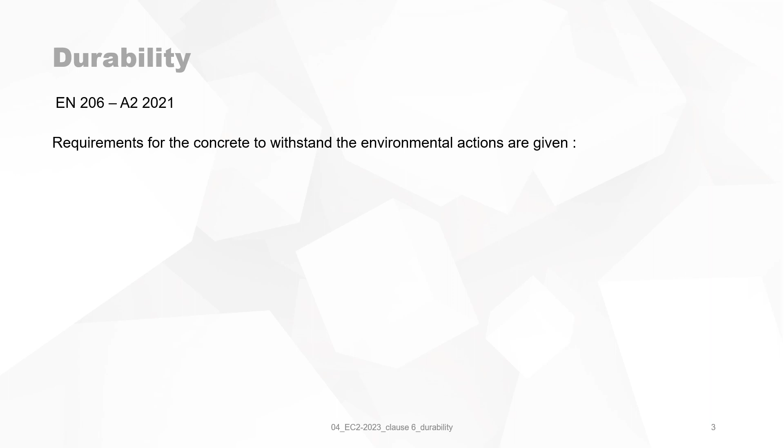This video deals with clause 6, and it's about durability and concrete cover. The requirements for the concrete to withstand the environmental actions are given in EN 206 with the correction of 2021. And for the requirements, you can have two different concepts.

The first one is in terms of limiting values for concrete composition and established concrete properties. This means that you are defining the content of a mixture, for instance. Today we are in the version of Eurocode 2004. Then we have Annex F in the EN 206, which is a table with, for instance, minimum cement content for a certain type of concrete mix. So you are really defining the content of the mixture, not the performance of the mixture.

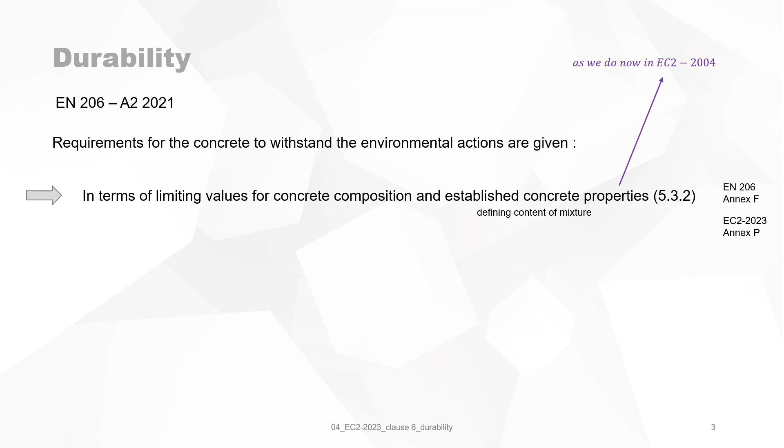In Eurocode 2 2023, there is an Annex P, which is also allowing you to use this method of defining content of mixture. So this is the first concept, as we do now in Eurocode 2 version 2004.

A second method is that the requirements may be derived from performance-related methods. It's a completely different philosophy. So you are now defining the performance of the concrete and not the content. So the requirements related to exposure classes may be established by using performance-related methods for durability and may be specified in terms of performance-related parameters, for instance, scaling of concrete in a freeze-thaw test.

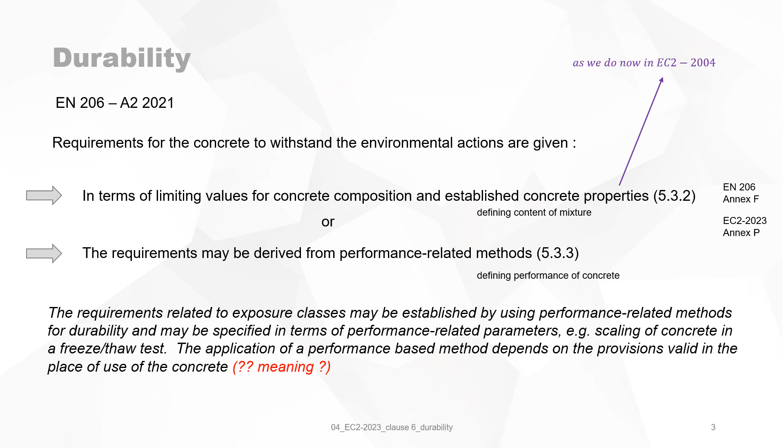And then there is a sentence following, directly cited from the code: the application of a performance-based method depends on the provisions valid in the place of use of the concrete. This is a sentence I do not understand the meaning of. What does it really mean, this sentence? And what can you do with it? The Eurocode 2 2023 promotes the performance-related method and the defining of performance of concrete.

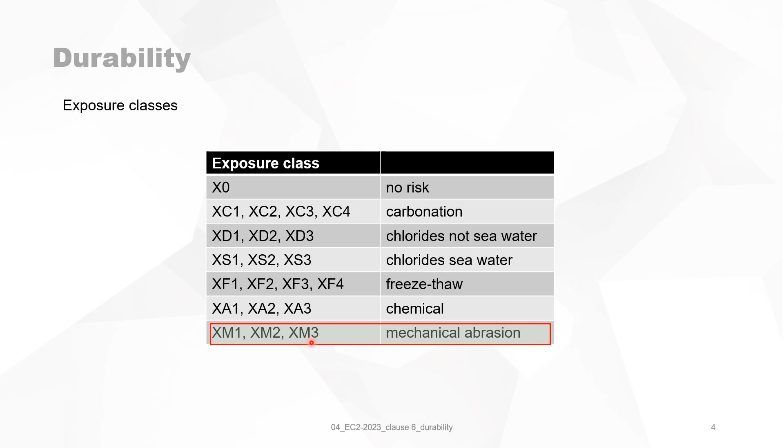Exposure classes are the same as we have seen in the version of 2004. All those exposure classes are the same, but they have added now the mechanical abrasion classes, XM1, XM2 and XM3, which were missing in the previous code. So that's fine.

There's a new concept, and they call it the exposure resistance class. And the exposure resistance class is needed to define the performance of the concrete. Classes for defining the resistance of concrete against corrosion induced by carbonation, it's then XRC, exposure resistance class for carbonation, or for chlorides, it's XRDS, and damage caused by freeze and thaw attack is XRF.

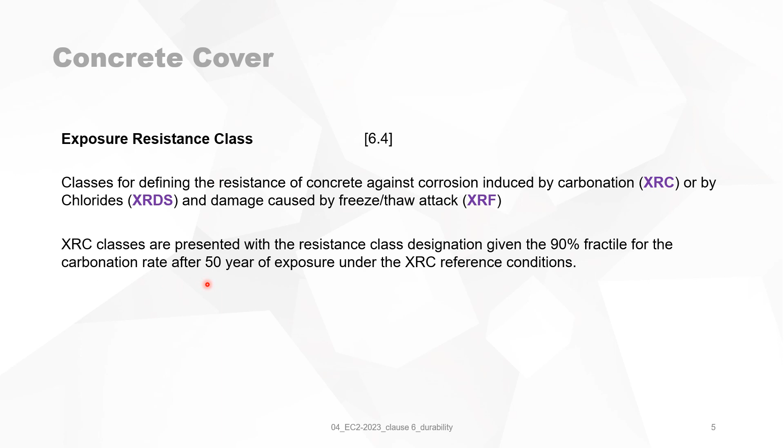Now we will look at the XRC classes. They are presented with the resistance class designation given as the 90% fractile for the carbonation rate after 50 years of exposure under the XRC reference conditions. Okay, so it's a statistical approach.

As a rule of thumb, you can, for instance, say the XRC class number has a dimension of carbonation rate. So, for instance, XRC 4 means that the number 4 is in fact millimeters per square root of years. Now, XRC 4 for 50 years means that you have 4 times square root of 50, which means 28 millimeters of carbonated concrete in the period of 50 years with a probability of 90%. Okay, this is more or less a rule of thumb.

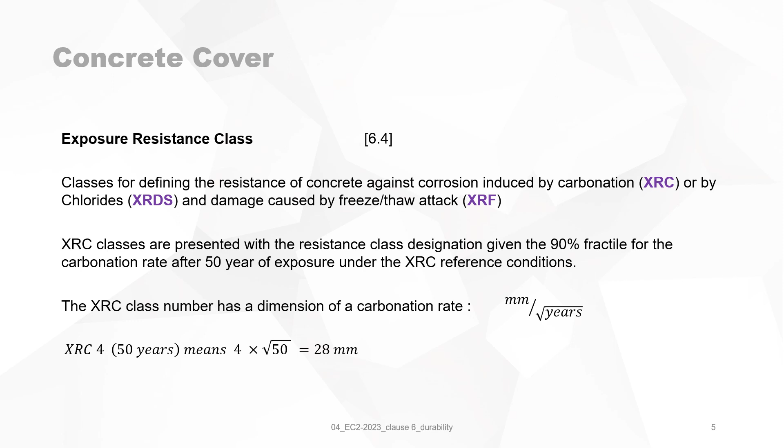If you use the proper probabilistic approach, it should read 3.6 times square root of 50, but it establishes the idea. So the XRC class number represents a dimension of carbonation rate. The minimum concrete cover c_min,dur for the XC exposure classes and the XRC classes until XRC7 are then given in a table.

First thing that we see is that in the version of 2004, we had structural classes going from S1 to S6, and in the later versions S5, but you had different structural classes and different values of c_min,dur. Now, I was wondering, where is the structural class now? Well, they have put it here. You only have 50 years and 100 years design service life. For all the others, there is no number given.

Second, if we look at the XRC classes and their number, and we use the formula that we used just now, the square root of 50 times the number, then you receive the millimeters of carbonation. And then you see it's more or less in correspondence with the XC4 values for 50 years, but the figures are rounded off and things like that. It's just a matter of ease of use.

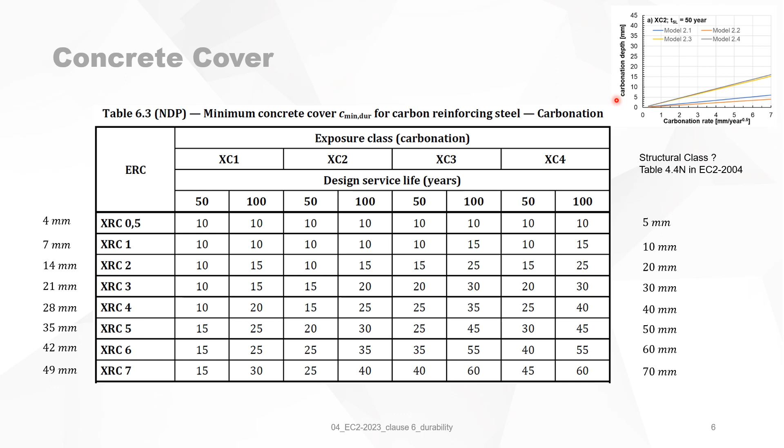And for instance, to give you an idea, for an XC2 class, you have 4 models of carbonation depth. If you have on the x-axis the carbonation rate and on the y-axis the carbonation depth, then for the 4 models you have different lines. So there are a lot of studies, and it all depends on the probabilistic assumptions that you made before you arrive at this figure. So those figures are based on all those graphs, on probabilistic assumptions, and then they round it off or limit it to a certain minimum value. For instance, you will not have a concrete cover of 5 millimeters, which makes no sense.

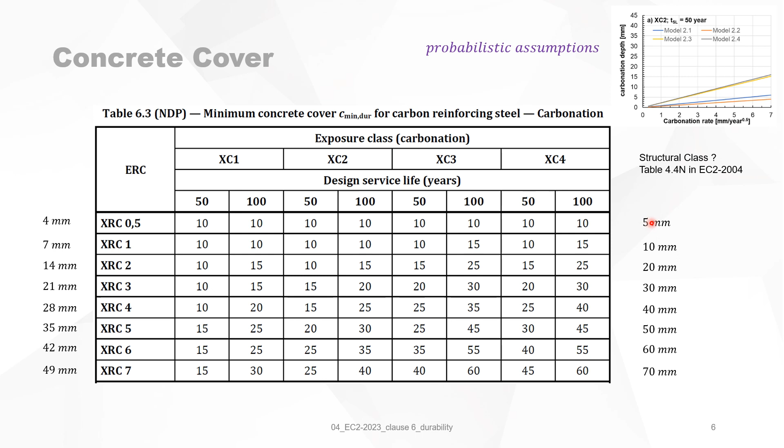Depth of chlorides penetration, characteristic value 90% fractile, corresponding to a reference chloride concentration of 0.6% by mass of binder cement, assumed to be obtained after 50 years on a concrete exposed to one-sided penetration of a reference seawater mix of 30 grams per liter sodium chloride at 20 degrees Celsius. So this is really a standard.

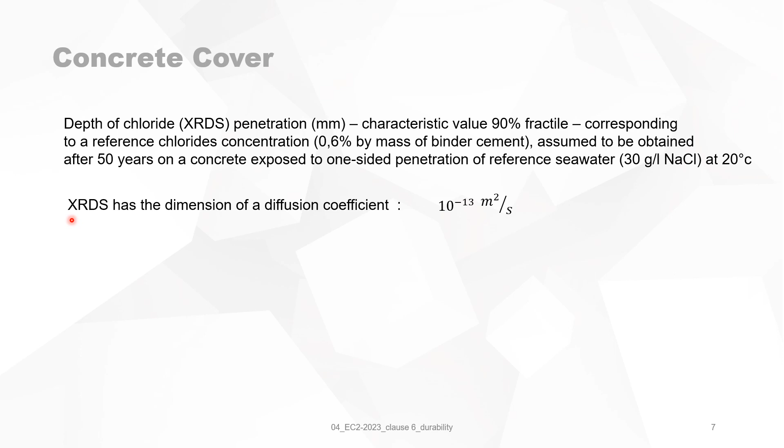And then you can have also the exposure resistance classes for chlorides, XRDS, and it has a dimension of a diffusion coefficient, 10 to the power minus 13 meters squared per second. For instance, XRDS4 means the depth of penetration is 25 times the square root of that number, and it's 50 millimeters in this case. Why 25? Well, it has to do with units and with the probabilistic approach. So this means after 50 years under those conditions, the expected penetration depth of the chlorides is 50 millimeters.

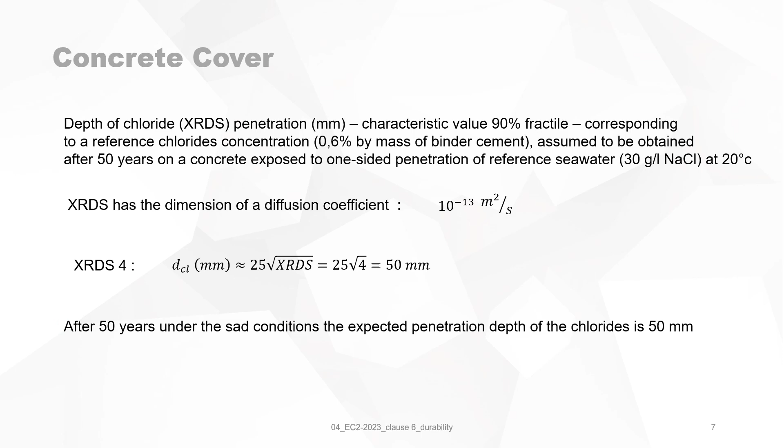Okay. Then you can have a table also in function of XS1 to XS3 and XD1 to XD3. So you make combinations of it. And then you have the different exposure resistance classes and the minimum required concrete cover. Now, in Eurocode 2 version 2004, the maximum minimum cover of reinforcement was 55 millimeters for structural class 6 or 5, that's for bridges. Now you will see immediately that for XS3, that's for marine structures, you can go up to 80 millimeters already. Even in XS2, you can have 80 millimeters.

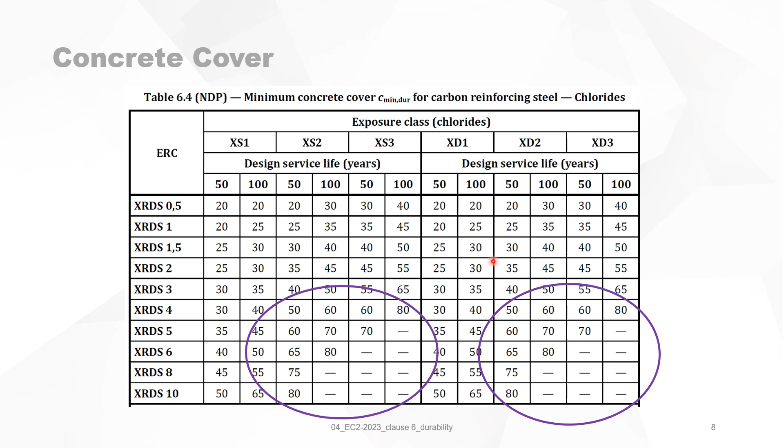So that's significantly more. And you can ask the question, is this feasible, making a concrete cover of 8 centimeters? Don't you need skin reinforcement now? Don't you have to fear falling of the concrete? So the same happens with XD1 to XD3. So the needed concrete cover is much higher.

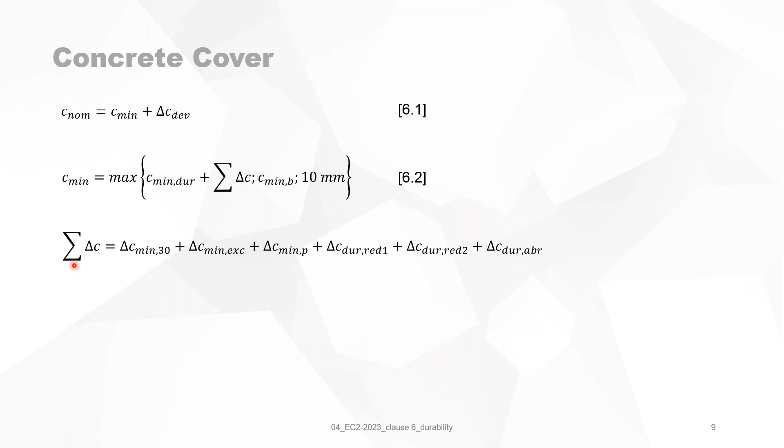Then the nominal cover is the minimum cover plus the tolerance. The minimum cover is then the maximum of what is stated here. And the delta C is a summation of different delta C's. And delta C min 30 means that when you have a design service life of less than 30 years, you can subtract 5 millimeters. You see, the structural classes were omitted in the table, but they will come back in the formulas.

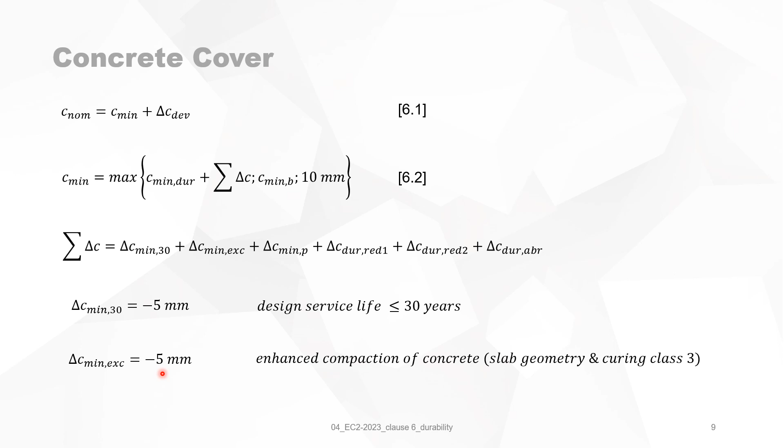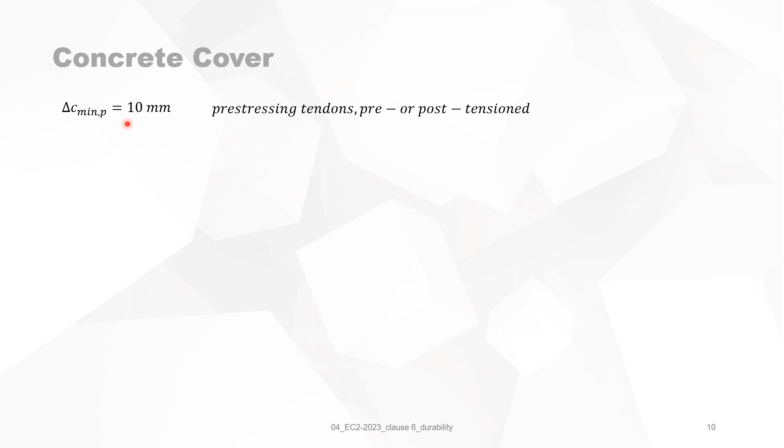Same in execution. This is the enhanced compaction of concrete. It means, in fact, structures with slab geometry and curing class 3. So this also, you can subtract 5 millimeters. This is also due to the fact that they do not use structural classes, so they cannot diminish the structural class for certain conditions, so they have put it into a formula. Same in P, the prestressing tendons: you can add 10 millimeters if you use prestressing tendons, pre- or post-tensioned. Then you have an additional reduction for additional protection of concrete when you have surface coating, then you can subtract 10 millimeters.

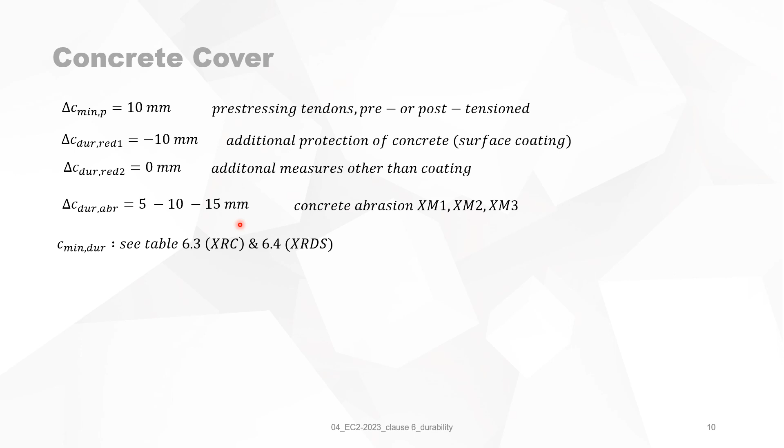Additional measures other than coating, none. You cannot have any gain on that. Concrete abrasion. So for XM1, M2, and M3, you can add 5, 10, or 15 millimeters. And the same are the tables that we have seen, 6.3 and 6.4. It's annoying that there's no table for XRF. So I don't know what to do when you only have XRF. So maybe the tables will come, but in the present version of Eurocode 2, there are no tables for XRF.

C min,b is the maximum diameter used for separate bars, and it's the maximum diameter plus 5 millimeters for separated bars with a diameter bigger than 32 millimeters. And C min,b equals this formula for bundled bars.

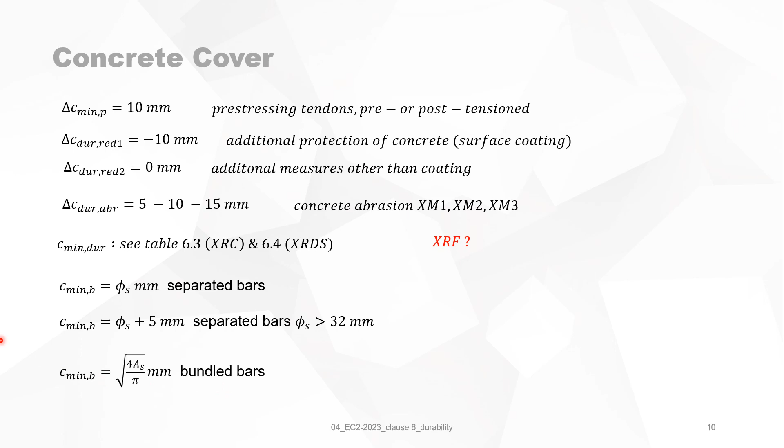Then the allowance for the deviation, delta C dev: instead of just 0, 5, or 10 millimeters, they have now made a table with explicit conditions so that it's clear what to use. In general, it will always be 10 millimeters, and if you have execution tolerance class 2, you can have 5 millimeters, and so on. I will not read all those different elements, but we can recognize the 40 millimeters and the 75 as traditional.

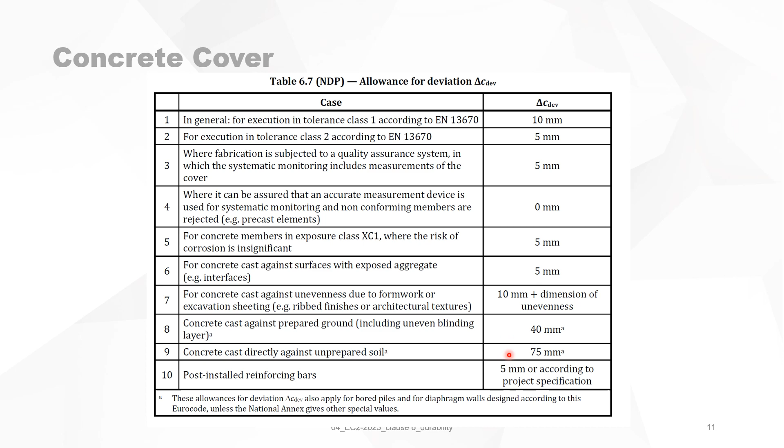Due to the philosophy of exposure resistance class, comparison with the present method of calculating the concrete cover is in fact not possible. So you remember the exposure resistance class is defining the performance of concrete, and the present method of Eurocode 2 version 2004 is based on defining the content of the mixture. Because of those two completely different principles, it is impossible to compare on an equal basis the required minimum cover of concrete.